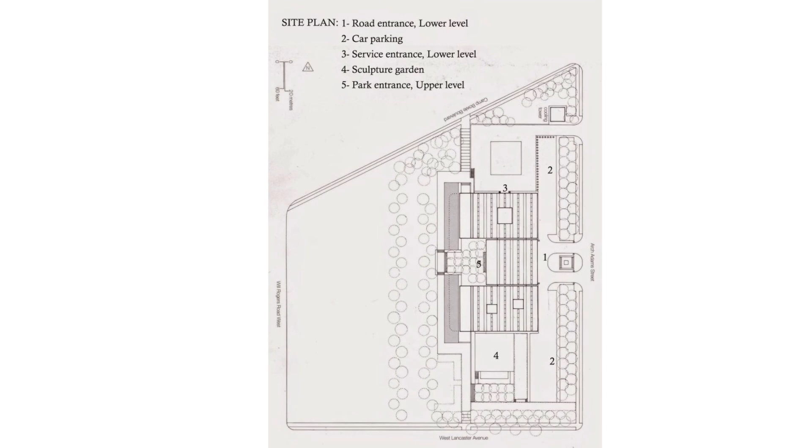In the late 1960s, Louis Kahn was commissioned by the Kimbell Art Foundation, founded by Kay and Velma Kimbell, to design a museum that would house their private art collection, then consisting of about 350 pieces. The museum was to be built on a 9.5-acre trapezoid of land in Fort Worth, Texas. The land sits in the middle of a triangular-shaped park with 3 pre-existing art museums.

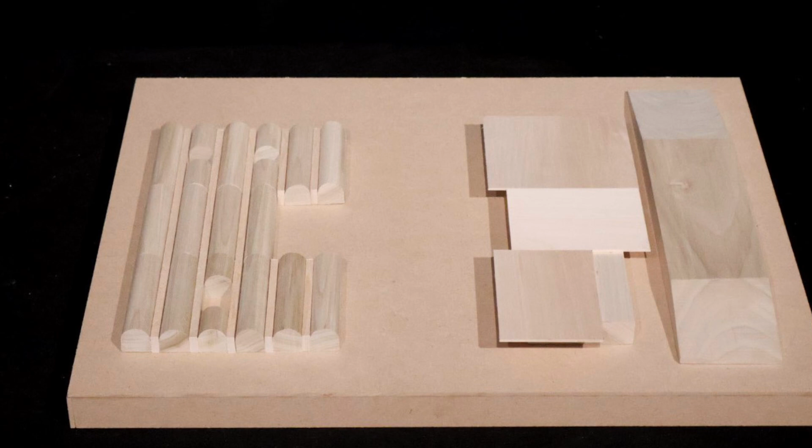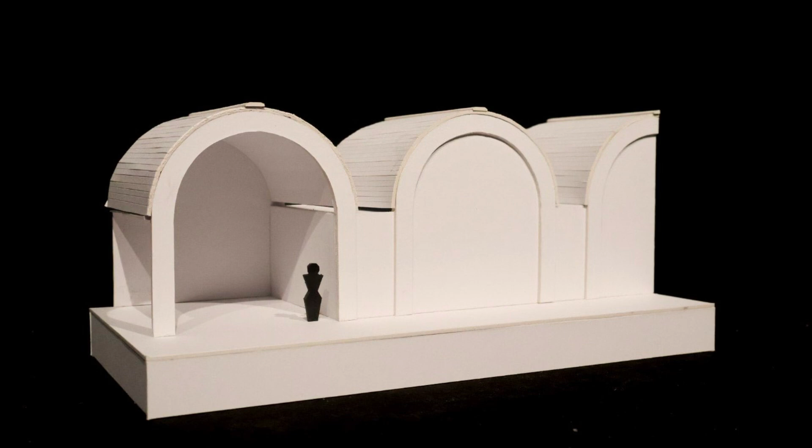Kahn worked with the museum director Richard F. Brown to come up with several designs of the museum before landing on the final version. The final design features 16 100-foot-long concrete cycloid vaults with open bays along the west facade and 3 courtyards breaking up the interior space.

One of his goals when designing this museum was to create a friendly space for visitors that allowed them to comfortably view the art on display. To do this, he integrated several visitor amenities, including a cafe, a shop, and 3 courtyards within the building.

To further enhance comfortability in the space, he included narrow skylights that stretch across the length of each vault, allowing natural light to flow into the rooms. The light is diffused by wing-shaped reflectors that hang below the skylights, illuminating the artwork and giving a silver gleam to the room, while simultaneously protecting the artwork from the effects of direct light.

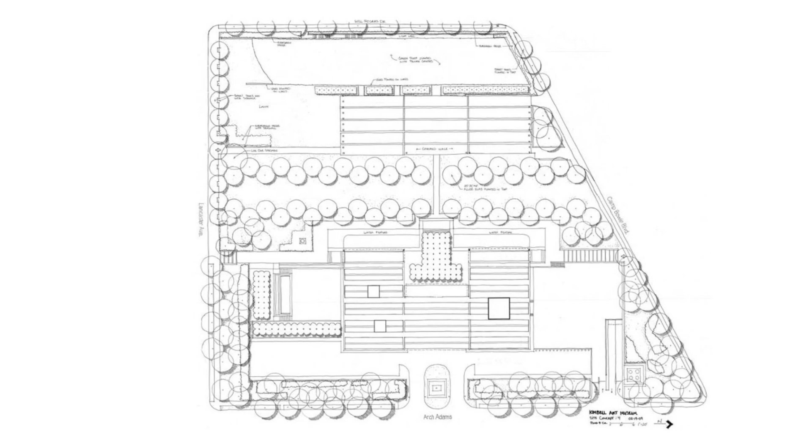Almost 40 years after the opening of the original building, Renzo Piano was asked to design an addition to the Kimbell Art Museum. The collection had grown exponentially since the completion of the first building, resulting in a need for larger gallery spaces and more visitor amenities. In his design process, Piano aimed to keep a dialogue with Kahn's building while addressing modern concerns.

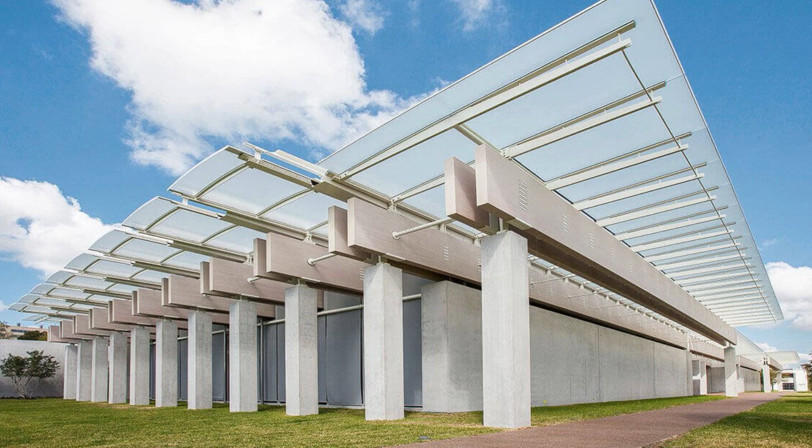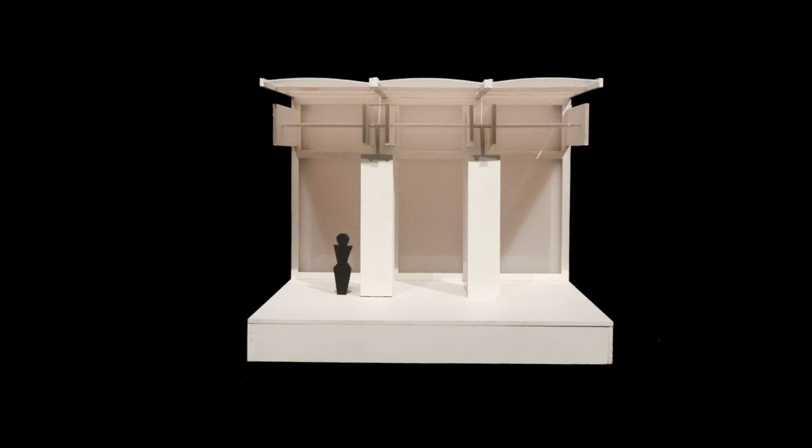Keeping in mind Kahn's theme of indirect natural light, Renzo Piano used the sunny climate of Fort Worth as an opportunity to design a more sustainable building. He covered a section of the building in a green roof, included solar panels on the roof, and used lighter materials like glass and steel to create a more energy-efficient building. He prioritized the use of natural light throughout the building with glass walls and a multi-layered frosted roof.

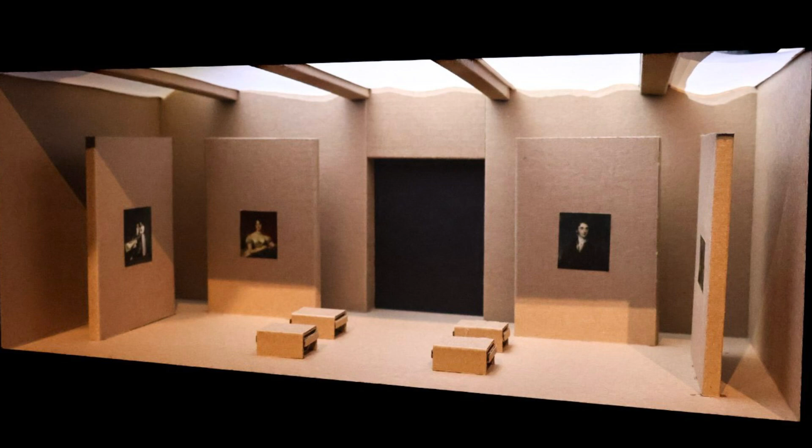Completed in 2013, his addition titled the Piano Pavilion not only provided more gallery space, an auditorium, and several classrooms to the museum, but successfully uses 50% less energy than the original building.

When displaying artwork, the type of light used is a crucial factor to properly illuminate the pieces while protecting them from damage, as well as instilling a comfortable environment for visitors. Both Louis Kahn and Renzo Piano took this into consideration when designing their buildings for the Kimbell Art Museum. Especially with the intense sunlight that Fort Worth receives, both architects found ways to diffuse the natural light and create the ideal environment within the museum.

Kahn's use of skylights that run along the entire length of the concrete vaults, along with wing-shaped aluminum reflectors that hang beneath them, allow for natural light to enter the building, but rely on the frosted glass and concrete walls to diffuse and reflect light throughout the room.

Inspired by Kahn's understanding of light, Piano took a different approach to reach a similar goal. The Piano Pavilion features glass walls lining the circumference of the building and several layers of frosted glass panels for the roof. The consistency of this design allows for a more steady distribution of light throughout the day, with less dependency on additional light sources.

As both separate architectural pieces and together as one museum, the original building and the addition of the Piano Pavilion display a harmony between light and structure to create an ideal environment for the display of art.